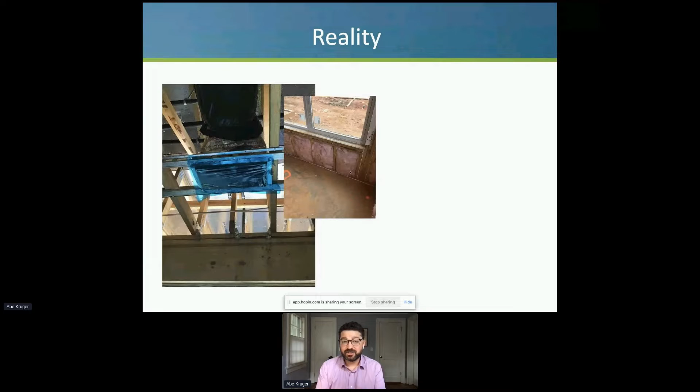If you've got filthy ducts, that building is not going to be healthy. We spent a lot of time looking at the insulation, making sure it was installed properly so that you have thermal comfort, so that the building is energy efficient, making sure it's properly air sealed.

This is one of the areas where we've really grown our practices, building enclosure consulting. So making sure flashing details are done right on windows. If that building is not properly managing bulk water, so from rain, water can get in, and that's where you end up with issues around microbial growth.

If a building rots to the ground within 5 years, I don't care if it's a LEED Platinum, that's not a sustainable building. That's not a healthy building. We want to make sure that these buildings are durable, long-lasting structures.

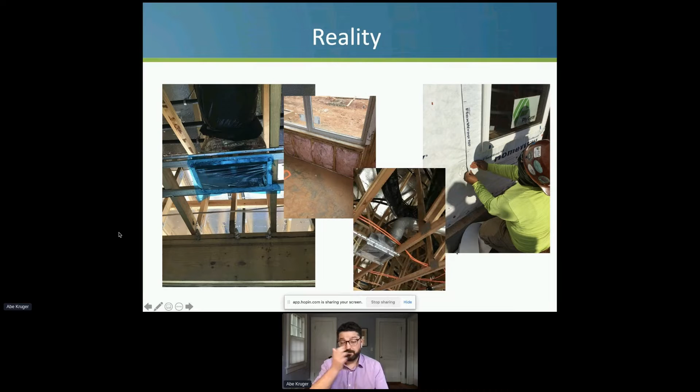And here I'm showing a bath exhaust fan with a hard metal pipe exhaust and mastic sealing. Okay, you might ask, what's this all about? It's really common for us to inspect bath exhaust fans and to measure the flow rate. So it might be rated at 80 CFM or even 100 CFM. And when we put our flow hood over top of it, we find that it's moving 0 CFM, sometimes 10 CFM.

And that reduction is because the duct is either poorly run, so it's got little curlicues, it's just going a long distance, it's getting compressed. A lot of times the exhaust comes out on one side and then it has to do a 180 to run to where the actual soffit is. So these are the details that you have to get right.

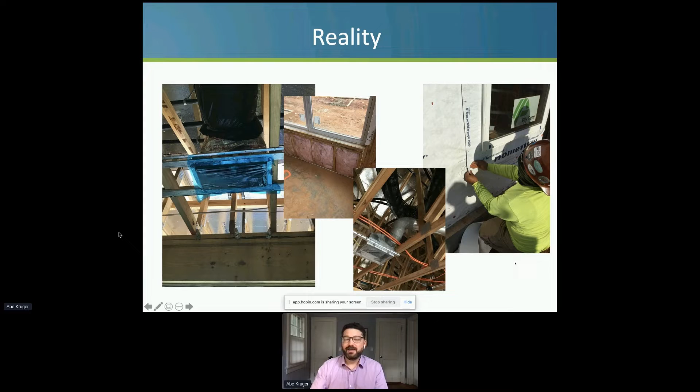So 90% of a healthy building is really in these fundamentals. And that's what we're going to be talking about today. And don't worry, we're going to get to talk about the flashy stuff a little bit too. All right, so to back up, I like to use this as kind of a way to frame the issue, to frame the conversation, and we're going to that 30,000 foot level.

So housing impacts your health really through 4 different pathways. Okay, the first is stability or instability. I think we can all agree that intuitively we understand that if you're experiencing homelessness, that's going to negatively impact your health. Just the act of being unstable in your housing, so not knowing if you might be evicted, not knowing if you're going to be able to make your rent or not, having to frequently move from one house to another, that instability negatively impacts your health.

It impacts your health through stress. It impacts your health through just additional costs. If you have kids, you're moving them from school to school to school. Okay, that instability negatively impacts health. We're going to talk about it a little bit, but not too much. Where our focus is going to be is quality and safety.

So this is referring to the indoor air quality within that home. Is there mold? Is there moisture? Are there pollutants inside that house? Is there carbon monoxide in the home from backdrafting gas appliances? Safety also encompasses things like trips and falls, fire hazards, electrical hazards. We're not going to get into that today.

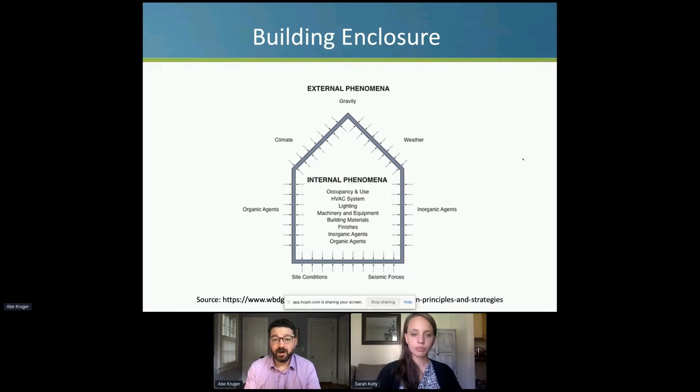So there's the building enclosure. This is the outer structure of the building, okay? And this is what's keeping the outside out, inside in, for lack of a better term. And really, from our point of view, we spend a lot of time looking at how the enclosure is performing at keeping moisture out.

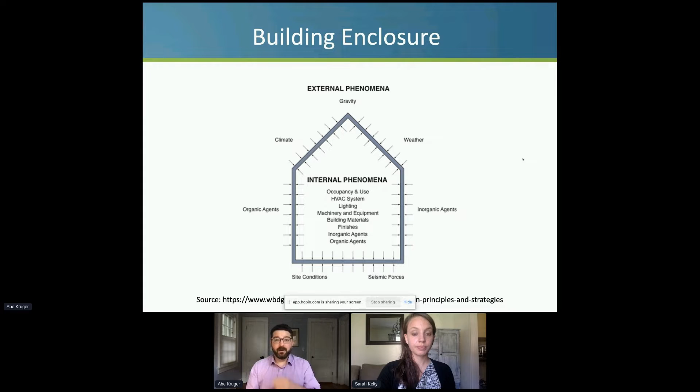And really, this is all about control. You've got to be able to control temperature, air movement, moisture movement. Once you can control those factors in a building, then you can make it healthy. Otherwise, with the steps you take to make a healthy building, you're going to be constantly fighting with a poorly installed envelope, poor insulation, big gaps in your envelope. So you've got to get the fundamentals right. You've got to have control over your space.

In multifamily, we then kind of zoom in at the unit level and we talk about unit compartmentalization. So the idea being that each unit should be its own, basically freestanding house or its own little island. When your neighbor is cooking fish, you don't want to smell it. You don't want to be breathing that. When your neighbor is smoking, you don't want to be breathing that. So we want to make sure that each unit is fully compartmentalized.

It's also not just from the neighbors, it might be from a shared hallway, an elevator shaft, a trash chute, a parking garage. There's lots of conditions around a unit that you want to make sure you are isolated from. And when we talk about building envelope, the two components that are key are insulation and air sealing. We need to make sure these are complete and in contact with one another. So when you're using fiberglass batts or anything air pervious, meaning air can go through it, so rock wool, fiberglass, that batt needs to be installed and enclosed on all 6 sides.

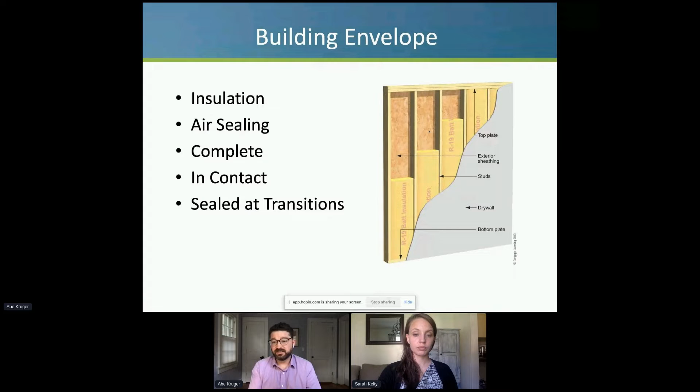So if we take a typical exterior wall, you have drywall on the interior, a stud, top plate, bottom plate, and then your exterior sheathing. Where we run into issues is when you have chases, when you've got double walls. And those are scenarios where sometimes that backside air barrier is missing.

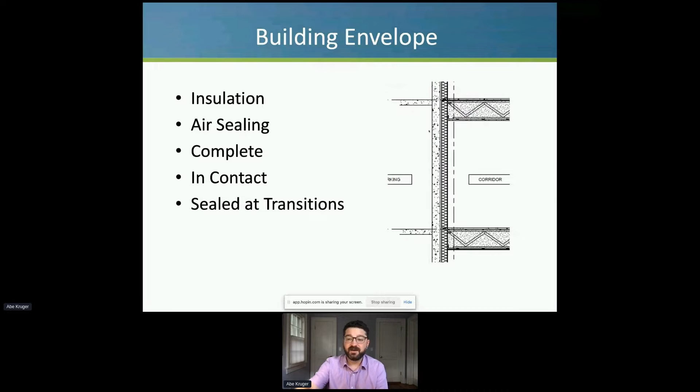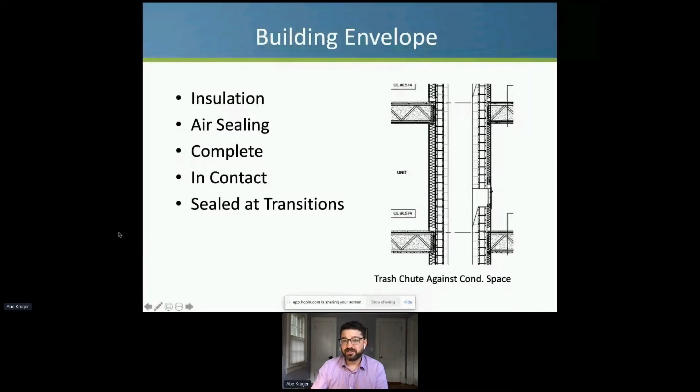So a lot of our job is marking up plans, identifying areas where you've got these conditions where here's a trash chute, okay? Here's your living unit. Is this wall getting fully insulated? Is there air sealing at the top and bottom? Is there a trash liner?

In single family, simply identifying the building envelope can be tricky. And so we talk to architects about doing what's called the pen test. You simply take your hand and a pen, put it on the plans, and then draw the building envelope. Just trace it. And if you can do it without lifting up the pen, that's a good start.

In Georgia and in other states, energy code requires that if it's an air pervious material, again like fiberglass or rock wool, it needs to have backside air barrier. So you need to pre-rock or put OSB, plywood. You need to put something rigid on the backside of that wall for this to be a complete building envelope.

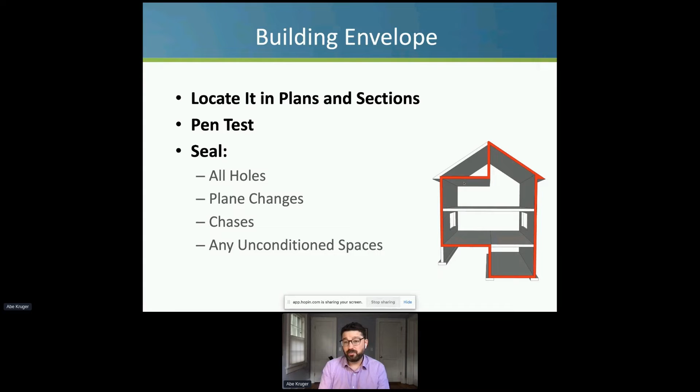All right, so how do we do this? What's the process here? How do we ensure all these little details are done right? You need a framework. You need some sort of structure for doing this. Green building programs are the best way. And there's also healthy building programs as well.

So nationally, the big green building programs are going to be National Green Building Standard from Home Innovation, which is actually the sister company to the National Association of Home Builders. So the NAHB, which is the professional association of home builders, they've got their research labs and they created the National Green Building Standard. So it really came out of the home building industry. So in many ways, it's pretty builder friendly because of that.

Then you have the U.S. Green Building Council's LEED for Homes program, and you have Enterprise Green Communities. Enterprise exclusively works with affordable housing. So you can only do Enterprise Green Communities if your development is affordable. Then we have programs like Energy Star, which is not really a green building program. Its focus is energy efficiency and durability. You have Passive House and Living Building Challenge.

We also have local and regional programs. So depending on where you are in the country, you might have kind of a home team. So in the Southeast, we've got EarthCraft. Florida, there's the Florida Green Building Program. Austin has their own program. North Carolina has their own program. At the end of the day, all the programs are very similar. And the key is going to be that third-party verification.

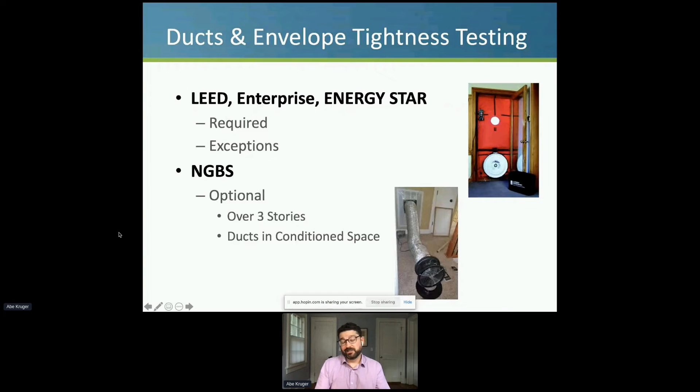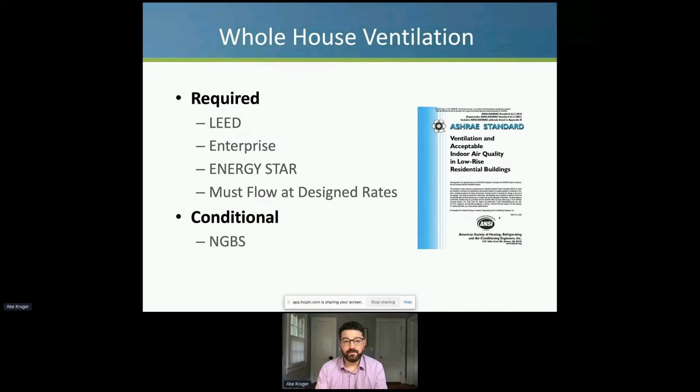Next is whole house ventilation. So programs point to what's called ASHRAE 62.2. Sometimes you hear this called fresh air, so outside air. It's required that you follow ASHRAE 62.2 for LEED, Enterprise, Energy Star. And there's flow testing requirements. So this is where we go back to my bath exhaust photos of making sure that the system that was installed is going to actually perform properly. It's conditional under NGBS, so you don't always need to have it.

Spot ventilation is required in kitchens and baths for LEED, Enterprise, Energy Star. And this is exhausted to the exterior, so not just a recirc hood. So you can't do a kitchen exhaust where it just blows it right back into your forehead. It actually has to be exhausted to the outside. And then NGBS only requires bath exhaust, which honestly is why some of our projects go that route. They say, shoot, over 100 units, I've got electric cooktops. To run my range to the exterior, that adds costs. You need to have a fire damper, et cetera. And so that might be why they choose NGBS instead of LEED.

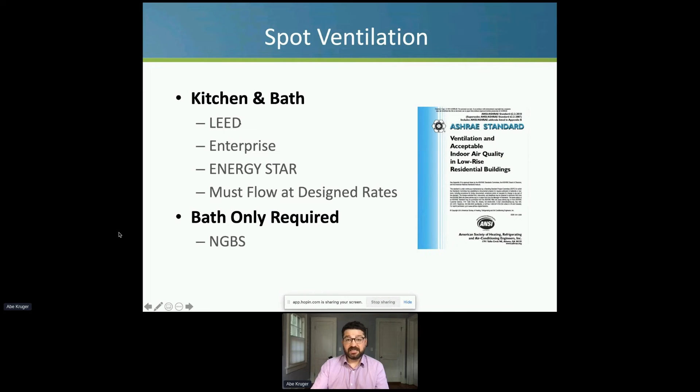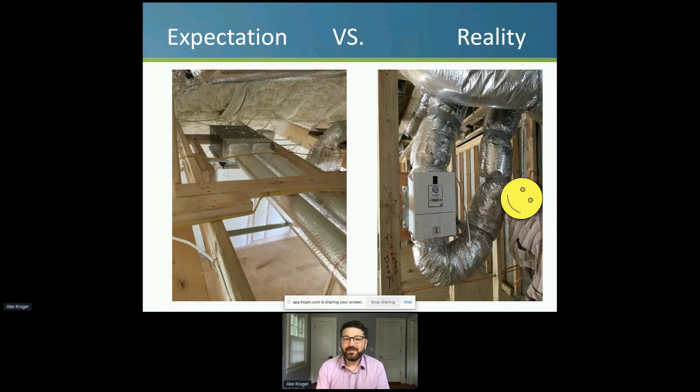What I'm really showing you here is a metal pipe wrapped in bubble wrap insulation. Okay, straight run, insulated. You're not going to have any risk of condensation on here. And we were able to measure the flow, and it performed as designed. Over here is a unit called QFresh, and the duct is coming down, making this hard bend, going up, oops, making a gnarly turn, and this was not performing as designed. And so that's where measurement and verification comes into play.

Over here, I'm showing a mechanical ventilation intake. Here is your dryer exhaust. All right, so is there a chance that as you're pulling in your fresh air, you're also pulling in your dryer air? Certainly. It's also pretty darn close to the outdoor condenser, which in the summertime is kicking off a lot of heat. Some of that is likely to be captured here. And so are these issues that code officials are going to catch? Probably not.

Over here is your intake and then your furnace exhaust. So this is a high efficiency furnace with a PVC pipe exhaust. You know, are the odds that this is going to be drawing that in? Probably not. Is that still a little close for comfort? Certainly.

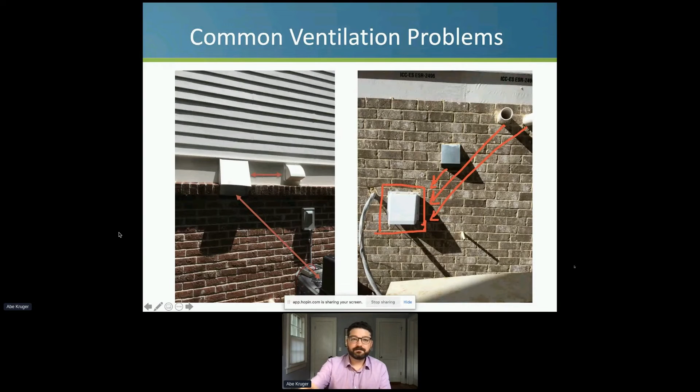On the left is another ERV, and this one is a four pipe, is what it's commonly called. So there's one exhaust to the outside, one intake from the outside, one return from the inside, and then one supply to the inside. And they just literally got it ass backwards. We're standing around looking at it, and there's little arrows labeled on the box, and the supply was going to the return, the return was going to the supply. They set it backwards. And then over here is the intake where they had the damper just sealed shut.

So I would say when we flow test bath exhaust fans, 25% of the time to about a third of the time, the damper, there's usually a little screw to hold it in place during shipping. Sometimes it's a piece of tape, but it's left in place. So when we flow test it, it's literally 0 CFM. And that might be an 80 or 100 CFM Energy Star bath exhaust fan, and it's pulling 0 because the damper is stuck shut.

So again, that's where measurement verification comes into play. I don't care if you have a UV filter, if you've got a fancy Nest thermostat, if you've got indoor air quality cleaners, IAQ monitors, if your bath exhaust doesn't pull air, you're going to have moisture issues in that bathroom. You're probably going to have mold and mildew issues in that bathroom.

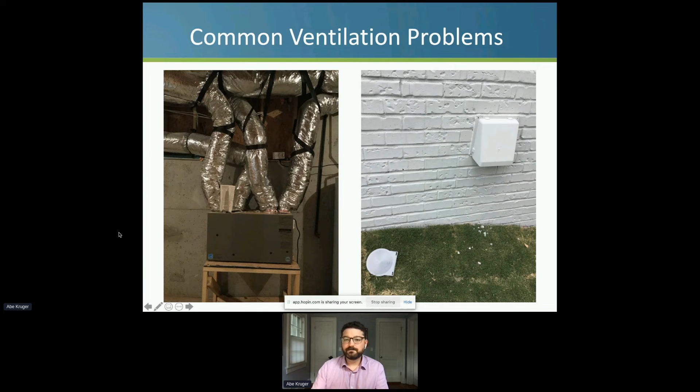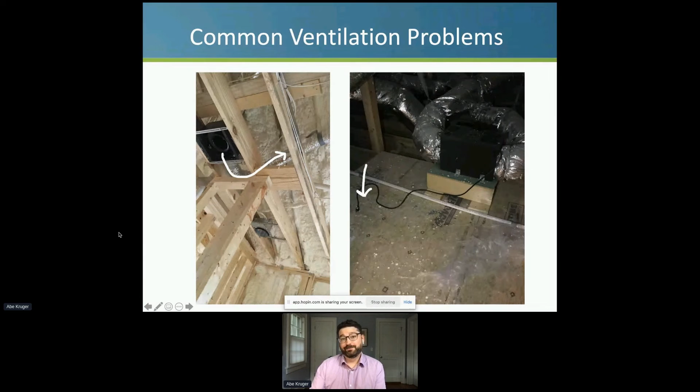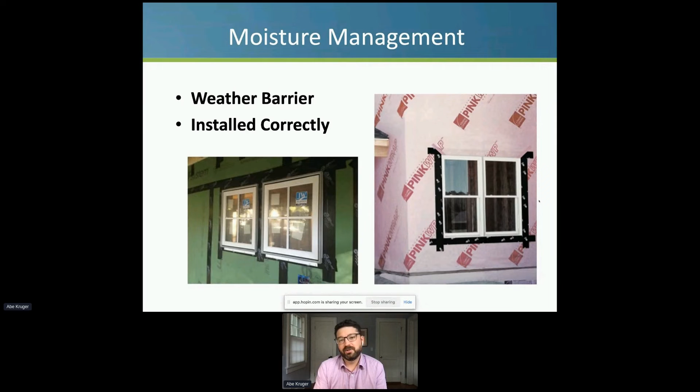All right, moisture management is another area where verification is key. So this is looking at the house wrap, making sure windows and doors are properly flashed. Any penetrations through that wall are flashed and sealed. We're looking at products like Zip, where that tape needs to be rolled to make sure there's no fish mouthing. So there's these bubbles and gaps that form.

And it's a simple thing. You're supposed to clean the surface, get any dust and debris off, put the tape on, and then just roll it. They've got little rollers that have a Z so that you push it just enough to leave this indent. All the time we find problems with the Zip installation.

Here's our spray rack where we're actually spraying water on the window. One of the most common things we find is manufacturer defects, where it's just bad windows that came off the assembly line. And so you had to pull the windows and send them back to the manufacturer.

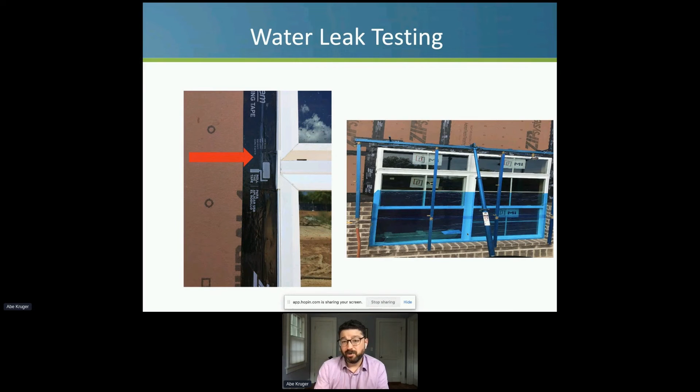Is that a pain for the general contractor? Oh yeah. Is it better to catch this during construction than later on once it's occupied and there's a heavy rainstorm? Definitely. More and more lenders are requiring this as well, especially around Atlanta. And I know other markets where there's been a lot of condos and apartments with window leak issues, especially with synthetic stucco.

Insulation, we're making sure it was installed properly. If you're not installing it properly, meaning cutting it left and right, top and bottom, not compressing it, splitting it around wires, you've got to do this for it to give you the comfort you want, the energy efficiency you want, and the sound transmittance that you want.

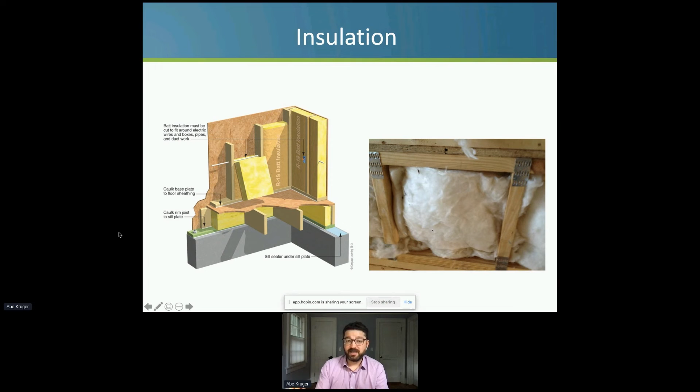All right, so green building programs offer robust on-site verification. They take a holistic approach to the building. Then we have programs like Fitwel and WELL. So Fitwel comes from the Center for Active Design out of New York. They've got over 1,000 projects certified or in the works, a bunch of registered projects, and they're in over 40 countries.

Fitwel takes a holistic approach at occupant health. And a lot of what they're looking at is how do you encourage healthy living and healthy activities? So everything from vending machines and snack bars, more of a commercial building issue, to where is it located, the neighborhood, building access, outdoor space, indoor environment.

Fitwel is gaining a lot of traction in multifamily because Fannie Mae has a rewards program, which I'm going to talk about in just a second. But here's a project here in Atlanta called Amani Place. If you're familiar with Atlanta, it's in the Edgewood neighborhood. 100% of the units are affordable at 60% AMI or below. For folks not familiar, that's area median income, and this is pretty deeply affordable.

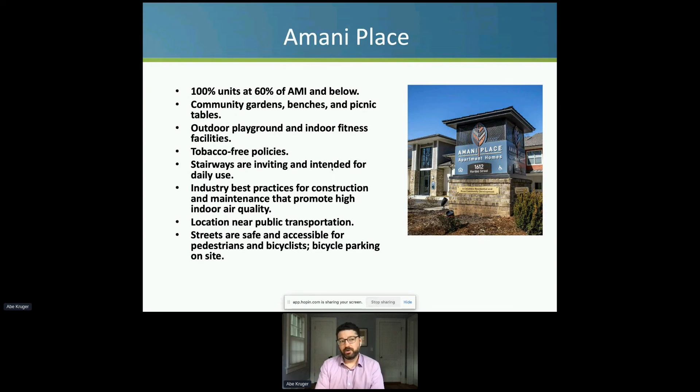There's community gardens, benches, picnic tables, a playground, indoor fitness. So there's lots of things here that are encouraging active living and healthy habits. We also certified it as green building as well. So you layered the two. And I would say you can achieve all of this with a green building program using LEED, using NGBS. You can do this. But sometimes it's easier just to do both.

And Fannie Mae right now only recognizes Fitwel. So that's part of the reason why we see a lot of interest in it for the Healthy Housing Rewards Program. There are two pathways. One pathway gets you up to a 15 basis point reduction. That's using Fitwel, and that's called the design pathway. There's then also an option where you have additional on-site services, and that will get you up to a 30 basis point reduction.

Amani Place used Fitwel. Fannie Mae actually put out a little case study on the project, so I recommend folks go and check it out. In addition to the basis point reduction, one of the carrots is water and energy savings can be underwritten. Fannie Mae also covers the cost of the Fitwel certification. They cover the cost of an energy and water audit, so for like a rehab project. So there's a lot of great reasons to use Fitwel if you're open to using a Fannie Mae loan.

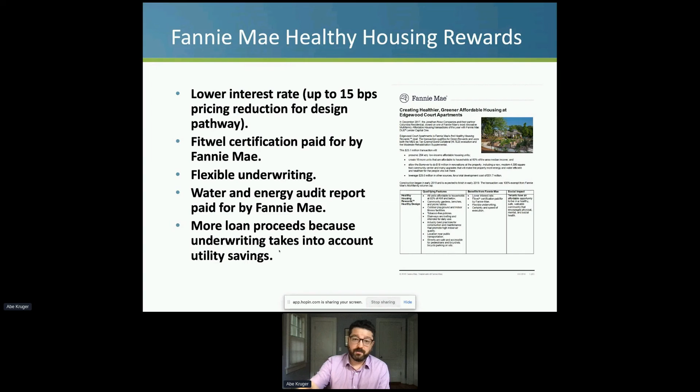Next, we have WELL. WELL takes a very different approach from Fitwel. And WELL has gained a lot of traction amongst corporate headquarters. So here in Atlanta, NCR, when they built their very nice gleaming high-rise a couple of years ago, they used WELL. So for more and more of those corporate headquarters, WELL is the darling right now.

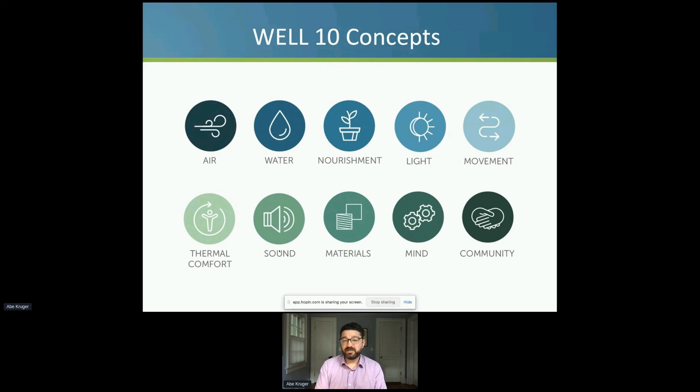And what's neat about WELL is they're taking a comprehensive approach, but it is performance-based. Where with green building programs, the emphasis is on making sure your ductwork is nice and tight through duct leakage testing, making sure your envelope is nice and tight through the blower door test. With WELL, you get to test all sorts of things. So there's actual air quality testing.

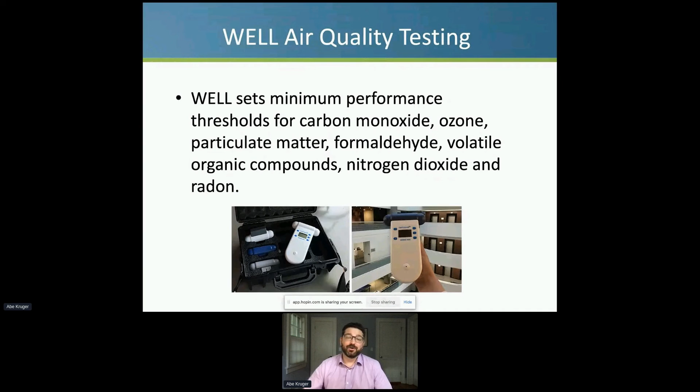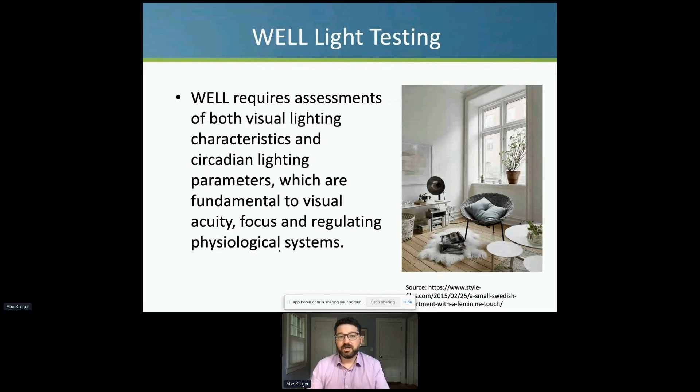WELL puts less of an emphasis on how you get to good air quality, and more of an emphasis on, well, did you do it or not? It's the whole, the proof is in the pudding. So they actually make you do air quality testing. They also make you do water quality testing to make sure that the water quality is good. There's light testing, looking at, do you have good daylighting?

There's comfort testing. So this is looking at temperature, mean radiant temperature. Mean radiant temperature is the temperature of the surfaces around you. So I like to give the example of, I live in a 1920s bungalow. Some walls we gutted and insulated, some walls we did not. Our living room is completely uninsulated, just original plaster. In the winter, in the living room, you feel much colder than you do in other areas of the house where the walls have been insulated.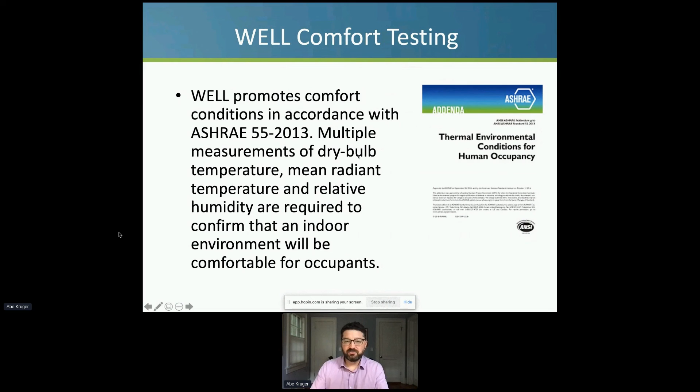And it's because in that living room, the temperature is still going to be 72, 74 degrees, wherever we have it set. But the walls are very cold. They're going to be like 50, 60 degrees. Whereas in the rest of the house where the walls are insulated, they're much warmer. So you don't feel as cold. So mean radiant temperature is part of this, and then relative humidity.

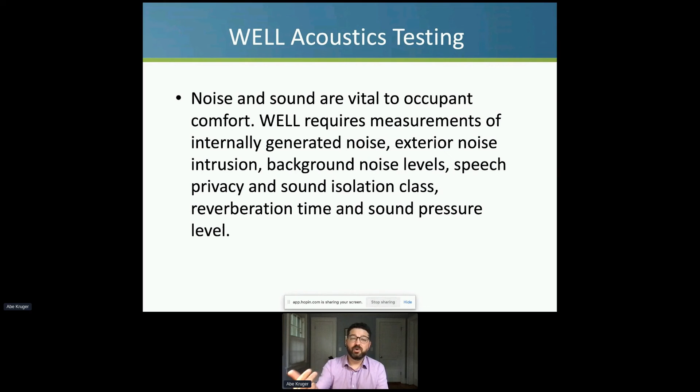And then acoustics are the other area. So again, where the green building programs would put an emphasis on making sure you're installing the batts well, WELL says, you know what, come back at the end and test.

I will say I'm on a working group with WELL right now, looking at residential, because I think they realize the WELL program is really designed for commercial office. And so it doesn't work that well, no pun intended, for multifamily projects. So that's on their radar as something to go after. It also has a reputation, justifiably, of being really expensive.

The one exception to that is all projects using Enterprise Green Communities version 2020 get co-certified. So they're automatically WELL certified. And part of that partnership was for WELL to better understand multifamily projects. So if you have an affordable development and you're interested in WELL certification, do Enterprise Green Communities, as you'll get your WELL certification for free.

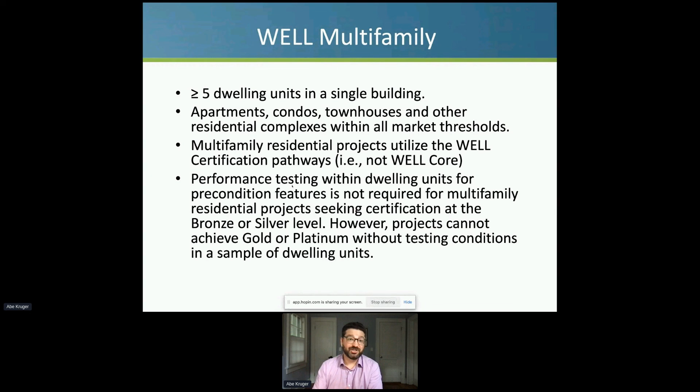All right, so once you get those fundamentals right, that's when we get to talk about the fun stuff, right? So I've got developers, I've got clients all the time like, all right, I get it. Insulation's important, air sealing's important, good, clean, straight ductwork is important, but residents don't care. Like, that's not sexy. How do I sell that? I can sell a Nest thermostat. And that's the unfortunate reality.

So what I say is, get those fundamentals right, and you're 90%, 95% of the way there to a healthy building. This stuff is the cherry on top, right? This is that last step. You don't want to rely on a filter to get you to good indoor air quality. You want to make sure that you don't have pollutants in that space, one, or if there are pollutants from cooking or from the bath, you're exhausting them at the source as effectively as possible so that those pollutants aren't all throughout the unit, and you need to have a good filter.